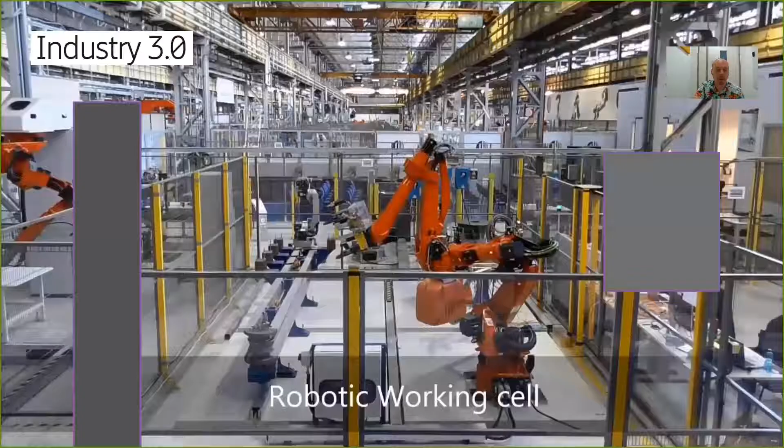In a regular Industry 3.0 setup, the robotic working cell is controlled, for example, with PLCs. They are doing the very same job 24/7. And the robot control is much about a robotic arm with power, servo control, analogue commands connected with the controller box.

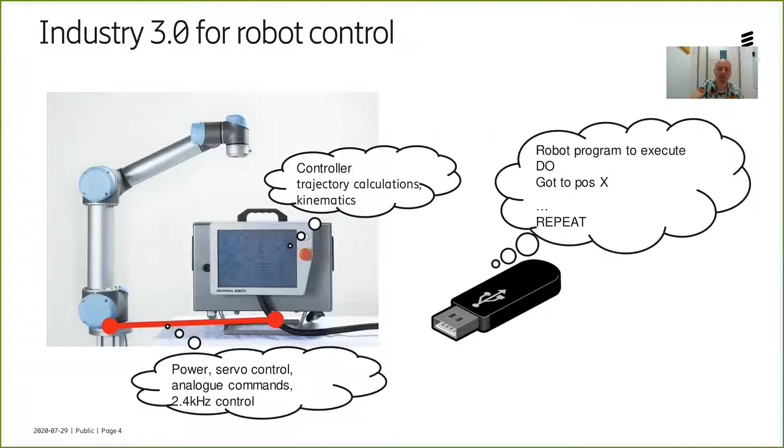And the controller box does all the trajectory calculations, kinematics, and this controller box is usually programmed by, for example, a USB key switched into it, which contains all the robot programs which have to be executed, and it's done 24/7 all year long. Very rarely does the program itself change.

In Industry 4.0, there are new hardwares in the setup. There can be an edge cloud with predictive maintenance, position and control over virtualized PLCs. There can be sensors all around the system, and there can be a radio, for example, to collect data from the sensors.

The robotic control in the Industry 4.0 scenario is that there is an edge cloud, and the robot cell scheduling is done in the edge cloud, and the controller, which was used to do the low-level control of the robot arm, still does the same, but the update or the trajectory is calculated much more frequently. Position commands are sent, for example, every 10 seconds to the robot controller.

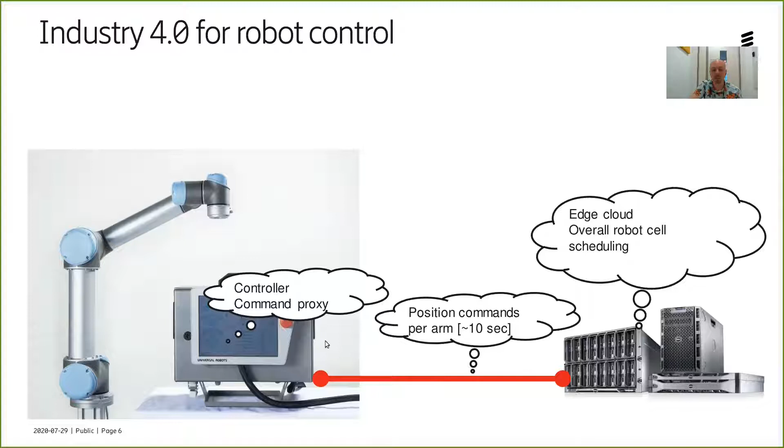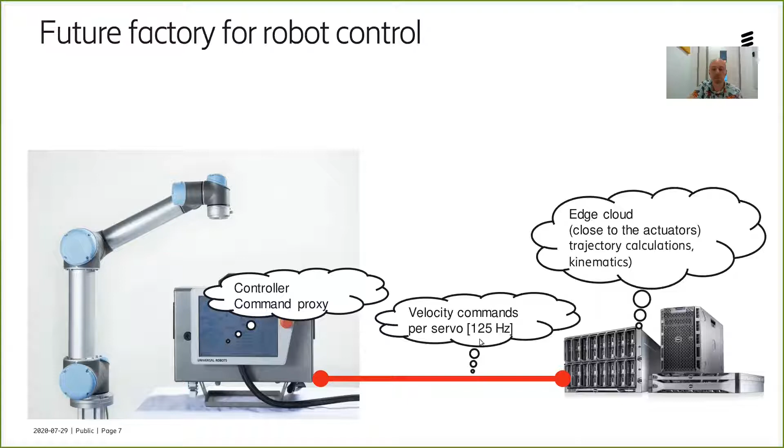If we go for this future factory for robot control, the edge cloud does the trajectory calculation and all the kinematics instead of the controller box. Practically, it is only for power and proxying the commands towards the robotic arm. And so velocity commands are sent per servo to the robotic arm at a much higher frequency. For this UR5, it happens to be 125 Hertz.

And so when there is this kind of control, with velocity commands going to the actuators and status messages coming from the robotic arm, the network quality is very important. If there is a glitch in the network, there will be a glitch in the motion of the robotic arm. So we need ultra reliable, low latency communication to ensure good, smooth movement of the robotic arm.

But do we need this URLLC connection 24/7 for a robot cell? In 2018, we said that maybe not. So the wireless control can be taken into action at robot cell programming level. And we proposed a quality of control aware wireless resource allocation algorithm based on the categorization of the robotic arm movement phases into high and low quality of control requiring movements,

saying that the various actions of the robot can be divided into important, accurate movements and unimportant movements, and you only have to ensure a good channel to the robot when it does some very accurate movement. It was manual then, and we said that only about 50% of the radio time requires URLLC, and the robot cell productivity is not affected if we relax these URLLC requirements.

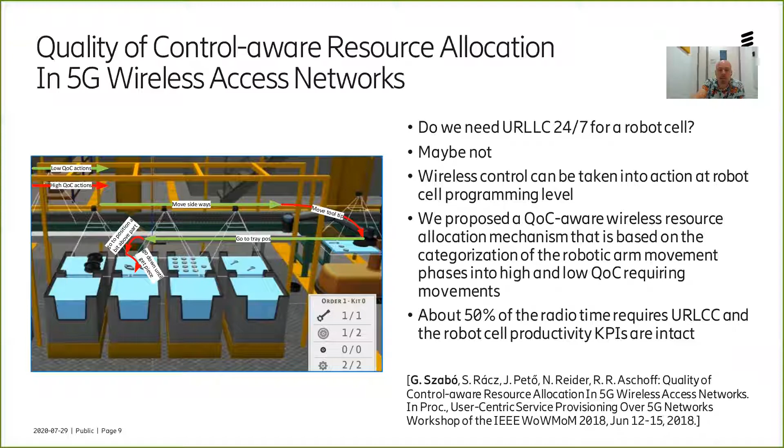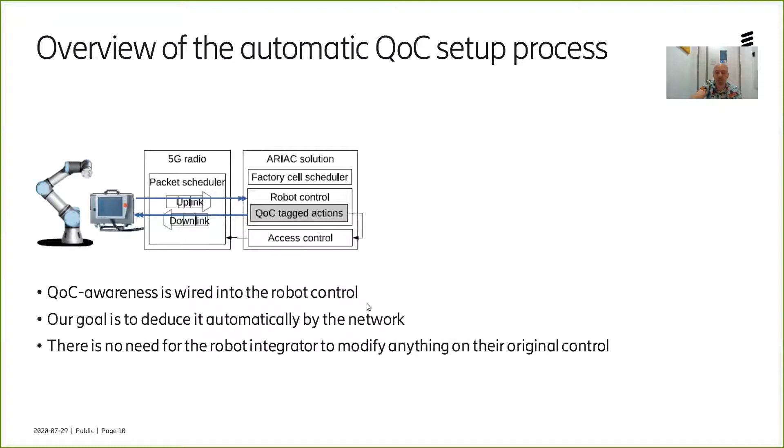At that time, we did everything manually. So the quality of control awareness is wired into the robot control. What we would like to achieve is to move this tagging to be done automatically into the radio and be used automatically by the network. From that point, there is no need for the robot integrator to modify anything in the original control. A good candidate algorithm to do that is, for example, reinforcement learning,

one type of AI algorithm that we can use there. In reinforcement learning, we need an environment where our agent does certain actions. We try to build up a policy to decide or do smart actions, and the environment responds with some kind of reward, and the state where this action has been taken is also noted. With an iterative process, the learner algorithm tries to refine the policy that the agent will follow.

If we have the environments that can be used for robotics, the most beneficial one, if we go with fully hardware realized environments, the benefit of it is that it's very easy to transfer the policy from training to the testing phase. The main disadvantage is that it's very expensive and very slow.

So for example, Google had this paper where robots try to learn grasping by sharing hand-eye coordination, and they built everything with hardware. They had dozens of robots doing the very same stuff, collecting samples for the reinforcement learning algorithm.

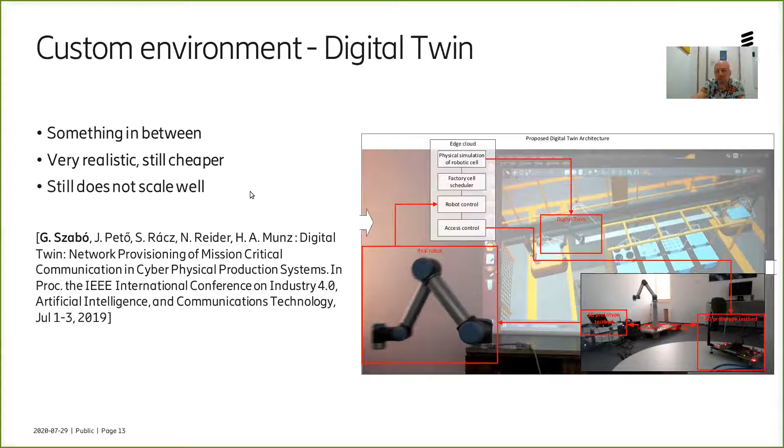It may behave differently. So to overcome this issue, we had a paper in 2019 about a network digital twin, which means a solution in between the fully hardware realized and the fully simulated one. It provides a very realistic training environment, still much cheaper than the fully hardware realized one, but it does not scale well, so we still need expensive robotic arms to do so.

So the solution for this scaling issue is that we introduced a custom reinforcement learning algorithm in which the environments and the workers testing our policies and collecting samples, these trajectories for the learners, are aware of the custom environment they were running in. And we said that this custom environment can contain the level of realism in which they were executed.

So for example, in this digital twin, a mostly hardware realized environment has a high level of realism, while a completely simulated environment has a lower level of realism. This refers to the robot cell deployment option, but it can also be used for the radio connectivity option: a fully hardware realized 5G URLLC device has a high level of realism compared to, for example, a Linux traffic control solution where all delay and jitter is emulated.

So we tag the trajectories with the environment where they were executed and collected, and the learner can consider the environment information and weight the samples accordingly. I would like to show this for you in action.

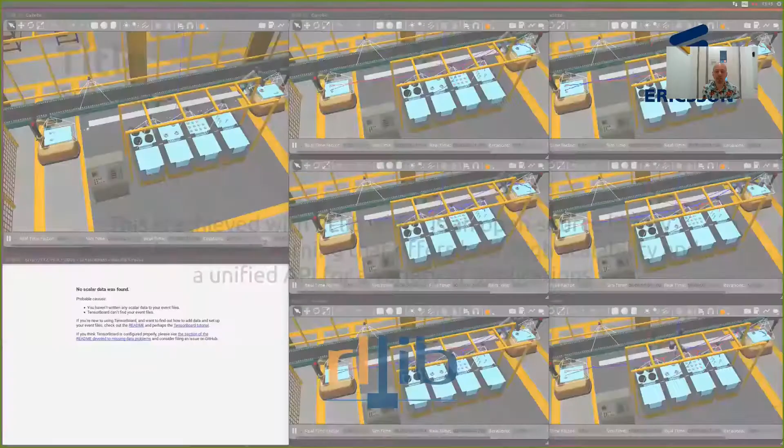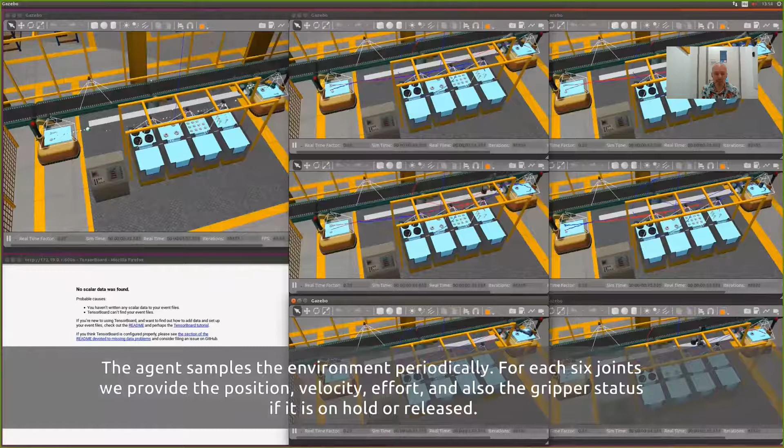ARIAC requires participants to complete a series of steps centered on an industrial scenario, based around collecting kits and shipping them on AGVs. The agent samples the environment periodically, and we provide position, velocity, effort, and gripper status for the robots. The action is selected from a discrete action space to switch between high or low quality of control mode every second.

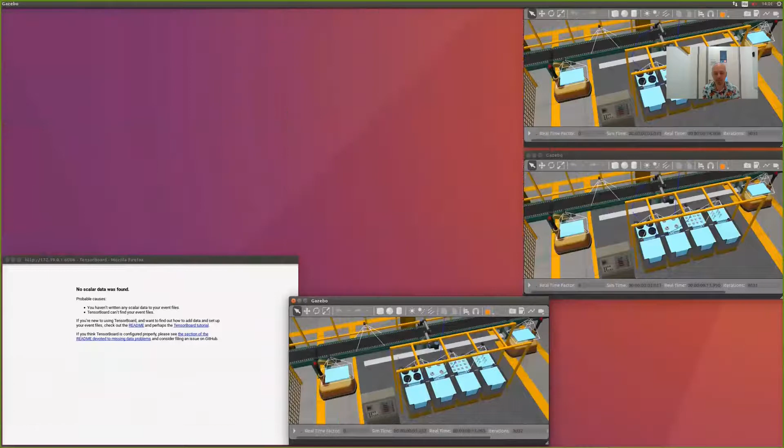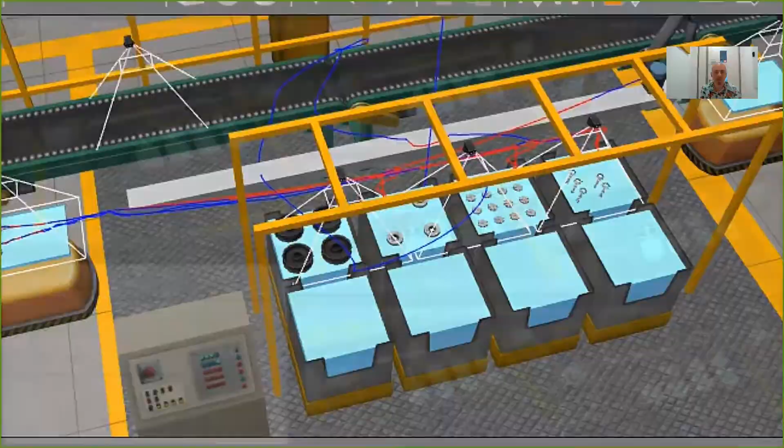What you see here is that colored lines show the currently used quality of control channel. Blue means low quality of control, red means high quality of control. We want to maximize the amount of blue lines. And this is the sped-up version of the learning. The colors of the spheres show the progression over time.

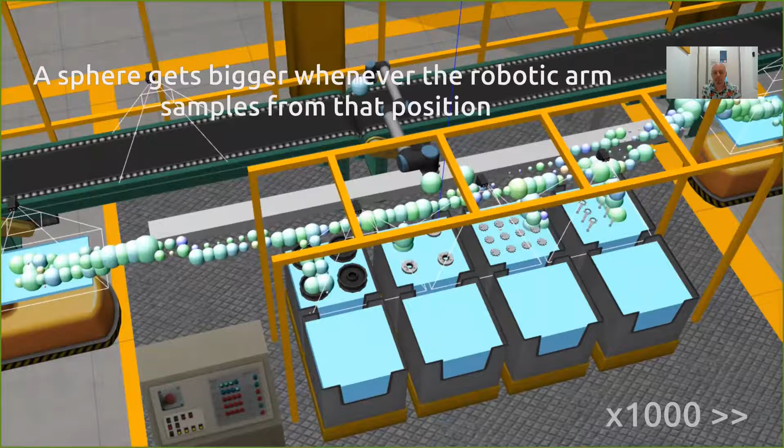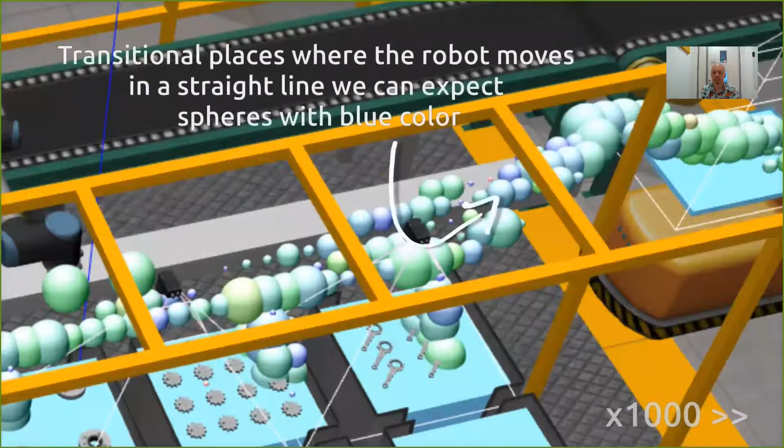What you see is this 1000 times sped-up environment. Blue means higher latency and low quality of control, and the goal is to maximize the amount of blue spheres. A sphere gets bigger whenever the robotic arm samples from that particular position, and in places where more precise movement is required, high quality of control dominates. Therefore, the spheres there are more reddish, and in the transitional places where the robot moves in a straight line, they're more bluish.

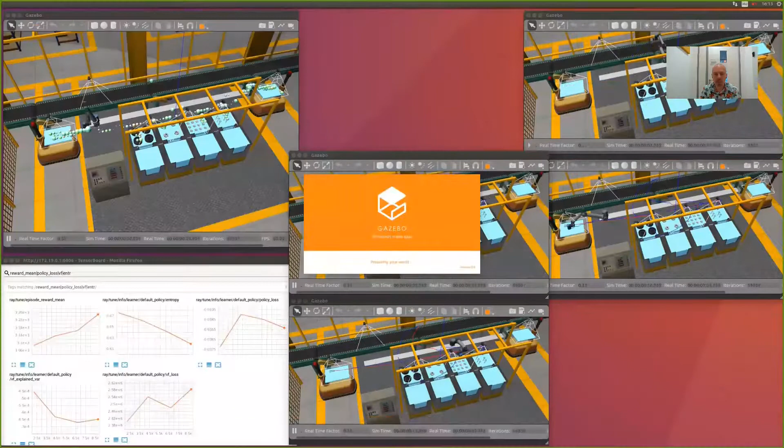You can see results after one day of continuous learning here, some KPIs. And we can say that after about 300 episodes, the agents pick low quality of control phases approximately 70% of the time. And here is the final learned policy.

And going back, we need ultra reliable low latency communication approximately 30% of the total radio time. In conclusion, in this paper we proposed an architecture in which radio access control is performed automatically to minimize the utilized radio resources while still maximizing the production KPIs of the robot cell.